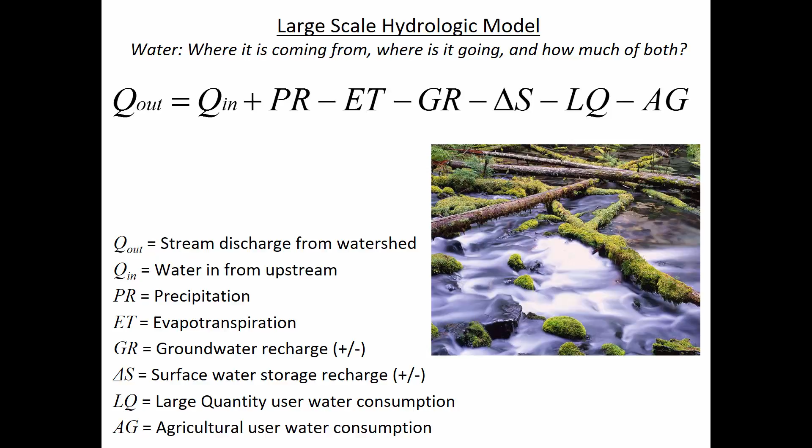Before we can find the flow coming out of a watershed—the word catchment is sometimes used to mean a smaller watershed, or to describe urban areas or urban watersheds. So in a catchment, one of the things that's going to influence how much outflow there is are abstractions.

This term is most widely defined as just the difference between precipitation and rainfall excess. This is an important distinction to make, and sometimes precipitation and rainfall excess are used interchangeably, but there's a subtle distinction between the two.

If you think about the water that falls from the sky, not all of that water is going to contribute to runoff. In fact, even if you account for infiltration, not all of the precipitation minus infiltration is going to be runoff, because sometimes the water gets stuck in other places.

Two of the places pictured here are surface puddles on a really flat sidewalk, or even if it's not puddling, the moisture can be wetting a surface. That water is retained or temporarily detained and then evaporates because of contact with the surface. So abstraction is either the amount of water or the timing delay that occurs when rainfall starts compared to how much actually contributes to the discharge.

We'll talk about a couple of processes that contribute to abstraction. It can slow down the peak flows. So if we think about trying to prevent the effects of urbanization, abstraction is a good thing because it's delaying the onset of peak flow. It's also reducing the quantities.

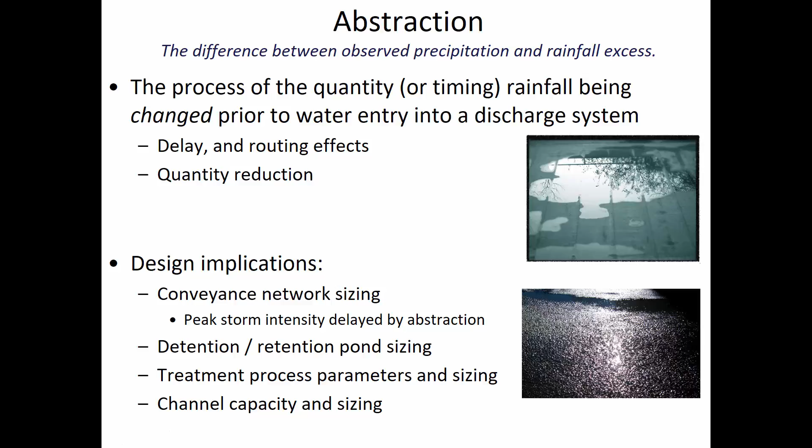Interception is one of the types of abstraction. We're not talking about football interception. What we're talking about is when the raindrop is falling through the sky, sometimes it comes in contact with plants, like trees or buildings or even crops like is pictured here. So the interception component of abstraction is how vegetation is temporarily or permanently delaying water from reaching the surface. You can see a raindrop here.

It's stuck on a plant. If it continues raining, it might tip that water over and all of it would dump onto the surface. Or it's possible that the water could evaporate and actually not make it to the bottom. So what do you think are some of the factors that affect how much water is intercepted by plants?

The amount of plants. Okay, that's a good factor. And what do you mean? You're right. And so what's your rationale there? Why do you think that's the case?

Okay, yeah. So you're thinking in terms of the surface area of a plant. Remember last week we were talking about clays and how clays have a really high surface area. Was that last week or two weeks ago? Okay, plants can have a high specific surface area just like other things can too. So the type of vegetation has an effect.

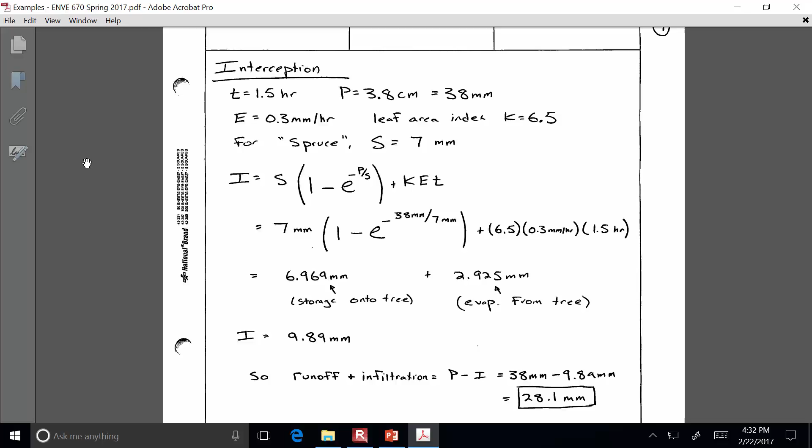Now, how accurate is this? Man, probably just barely accurate enough to even put into a textbook, because there are so many variables. If you think about it, temperature isn't directly in that formula. So how accurate do you suppose you're going to be able to estimate the amount of evaporation during a storm? And the leaf area index could vary from tree to tree. Like if I characterize the leaf area index for these big gigantic trees here that are hundreds of feet tall, it may be a completely different leaf area index for an oak tree that's not quite that tall.

So you always have to take approaches like this with a grain of salt. They may be important in illustrating a phenomenon that you have to be aware of, but it's really only just a starting point, or maybe like a holding place until you find a more accurate way of estimating something.

So this is just to look at summertime, with the leaves all around the trees. In this case, I guess it wouldn't necessarily matter because we were doing spruce, right? Spruce tree. And some things like a hardwood that's leafed and a hardwood that's bare are different. But spruce is an evergreen tree that would have the same leaf area index and same storage regardless of season. Now, probably the evaporation would have been different during winter compared to summer, but we don't have any information in the example here to distinguish between the seasons. I think on the homework, problem 1, I tell you that you should use a leafed hardwood tree rather than a bare hardwood tree. So you will have to distinguish between the two on the assignment.

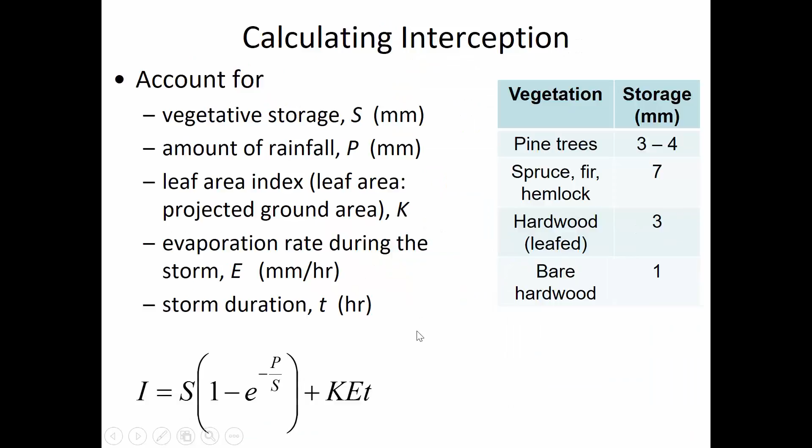Why does forest litter have a high depression storage but a low interception? Well, it depends on how you draw the line between interception and depression storage. Interception usually is meant for things above the ground. Forest litter, like branches that are broken or decaying leaves, I think is going to be lumped more towards depression storage. The forest litter, was that on the table we were looking at before? Yeah, hardwood litter, oak litter, and so on.

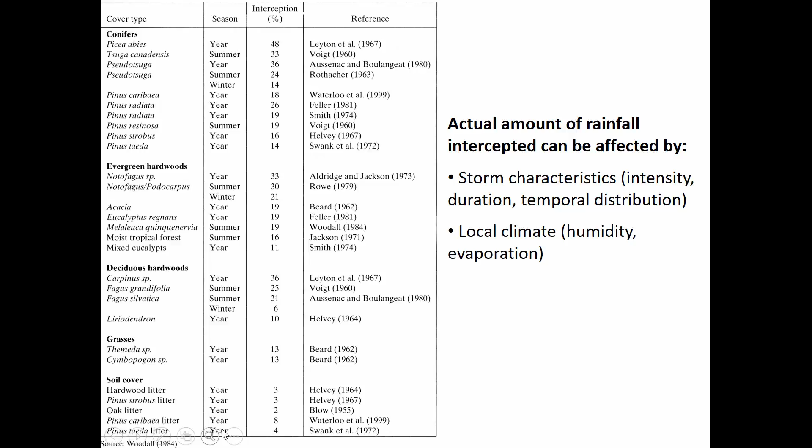I think it's because it's not preventing the water from getting to the ground. If those little twigs are laying on the ground, they're not preventing the water from getting to the ground, but what depression storage does is it may get to the ground, but it's not moving anywhere. So it's preventing overland flow. Does that make sense? Yeah.

At the very least, it causes delayed infiltration. We had the assumption of continuous ponding, and so water that is bound in the forest litter may eventually percolate down to the ground and may eventually infiltrate, but it's interfering with the continuous ponding that would have to be there for maximum infiltration.

Some of it will evaporate off of the forest litter, some of it will just stay there. I don't want to draw artificial distinctions and say the water that gets to the forest litter, that 7.6 millimeters, is just going to stay there forever, because some of it may eventually drip down. But in the case of all these abstractions, it's either a reduction in the quantity or a delay in the timing. It can have the same effect regardless of whether it's lost forever or just delayed, because we're wondering what it does to the peak, and it's going to delay the peak regardless of whether it's releasing the water for overland flow later or never at all.

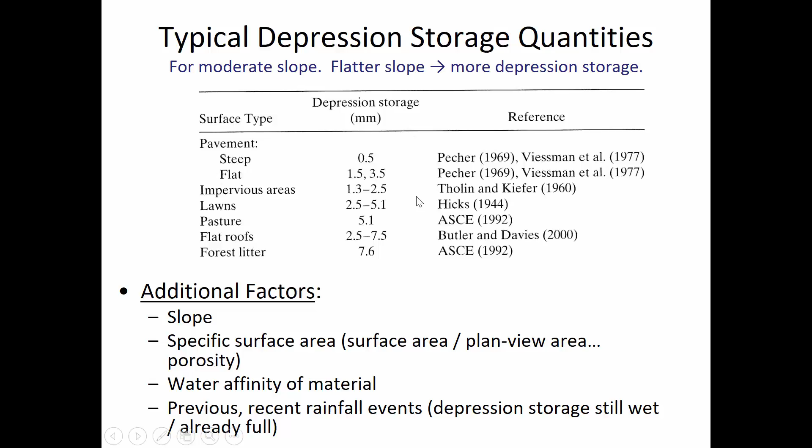Okay, so Q is what you're developing in hydrology. We want to know what flow rate is going to be coming out of a watershed in response to a storm, and we're interested for a lot of reasons, because it can affect the quality of the water and the amount of the water.

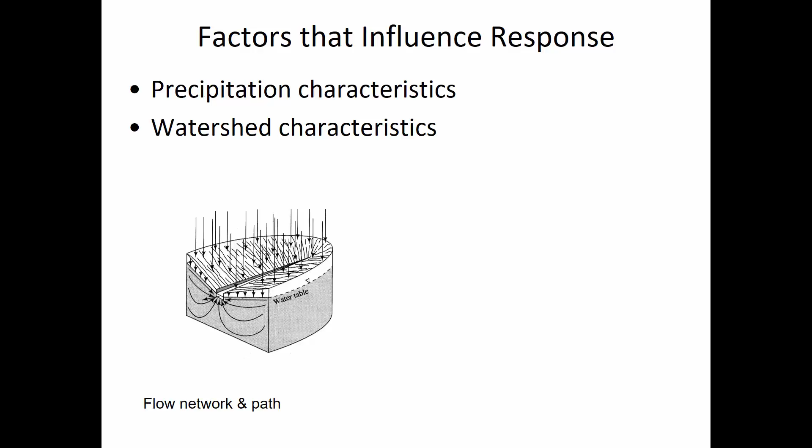Looking at the sinuosity of the streams is a factor. If you look at these streams, it looks like they're mostly straight, so the flow is going to drain into this river very quickly compared to if it was a lower slope inside of the watershed, and if the streams were meandering. Here in West Virginia, hydrologists talk about many watersheds being flashy, meaning that as soon as it rains, you have a very quick response in the stream. The reason for the flashiness of watersheds in West Virginia is because we have very steep topography, and the water is able to move over the surface pretty quick.

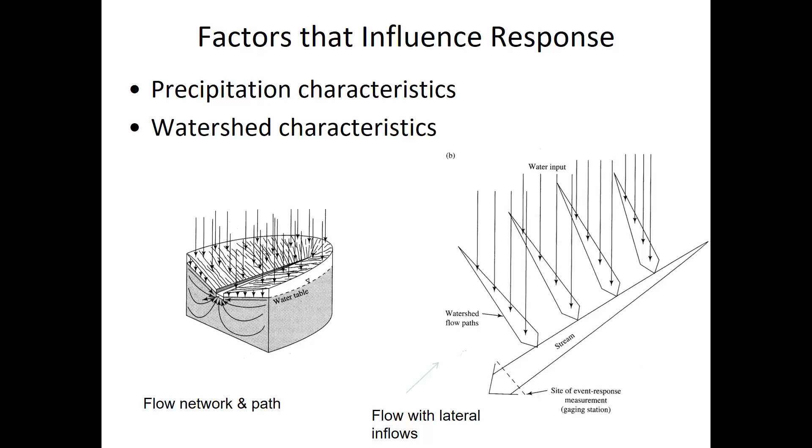There may be a certain spot that we call the outlet that we're interested in. But as we've talked about, an outlet is just a point of view. We may have a culvert crossing this stream, and so we could call this our outlet. All this other stuff is still happening, but as soon as we say that this is our outlet, that makes our watershed only the area upstream of that point that's contributing to the flow at the outlet we're interested in.

Here are some different types of drainage basins, and this is largely a function of geology in an area. There are places in the eastern panhandle of West Virginia, for example, that have trellis type streams. If you look at aerial maps, you'll notice that the streams are kind of straight there. They don't meander in the same way as, say, an aerial photo of Huntington, where the streams are all over the place in a pattern that's called dendritic.

But in coastal areas, like the coastal plain in the eastern panhandle of the state, you may have streams that are a lot more regular in their direction. Then there are combinations of these two extremes, rectangular and trellis, where it's the soil's resistance to erosion that affects where the streams go.

The streams go where the soil erodes the most quickly. That's the definition of a stream, is it's the low point in the topography, where whatever scour moved sediment downstream made it so the water would go there even more next time, because the ground level is lower and there's a greater energy differential between where the water falls and where it's going to.

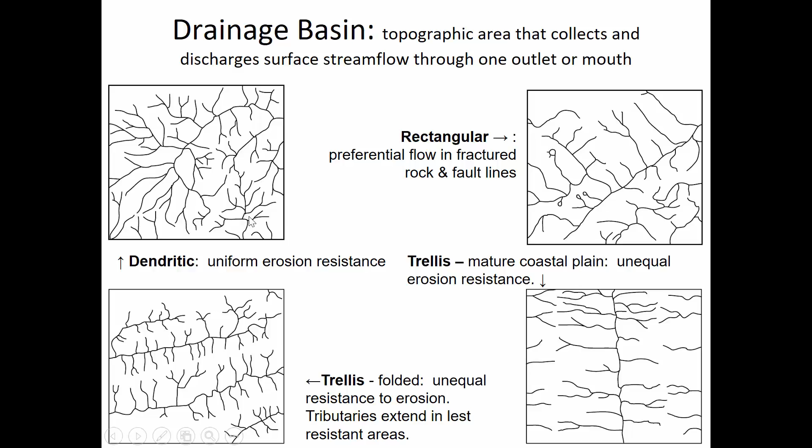Stream ordering is kind of an interesting idea because it can give you an idea of why certain locations are more prone to flooding. It's fairly straightforward that the more upstream tributaries there are, the bigger the peak flows are likely to be. A first order stream, here represented with the number 1, is a place where during a wet weather event there isn't going to be any upstream contributions to it. It's only receiving overland flow, basically sheet flow, to the first order stream. You'd have to go to a pretty small watershed size to see a first order stream — we're talking maybe less than an acre.

A second order stream is where you have the combination of two first order streams. You'll notice that a third order stream is where you have two second order streams coming together. And what would then make a fourth order stream is where you have two third order streams coming together. So the classification system is...

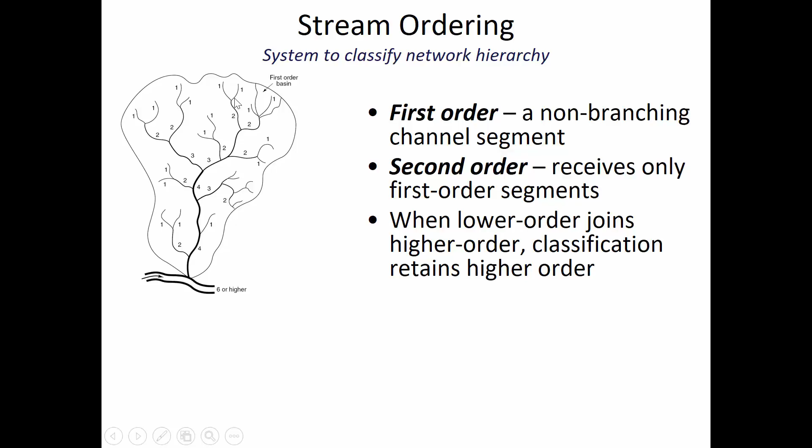In some ways, this isn't really meaningful from an analytical or quantitative standpoint — you're not going to look at a stream and know from the ordering what the flow rate's going to be. But it can sometimes tell you about the water quality you could expect, because a first order stream only has flow when it's actually wet weather. So the water you see there is probably not going to have any effects of base flow — it's not going to be groundwater coming back up to the surface.

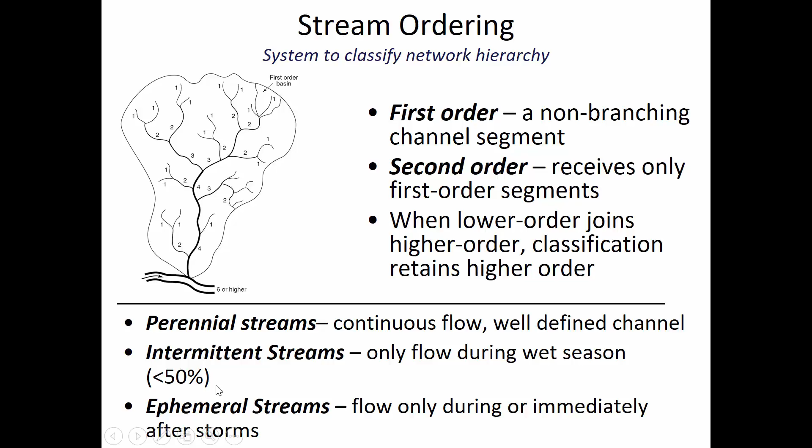In addition to these ordering classifications, there are also some terminology here: perennial, intermittent, and ephemeral. I've got a couple of pictures to illustrate the difference between those.

In the case of a perennial stream, water is present all of the time. This is a picture from the Wasatch Mountains in Utah, a famous trout fishing stream called the Provo River. You'll notice there's snow on the mountains, and that's what makes this a perennial stream—all through the summer there's snow melting in the mountains, and that feeds the Provo River. We have perennial streams here in West Virginia too, but they're not fed by summertime snow melt. They're fed by groundwater flowing towards the stream, so there's always water present.

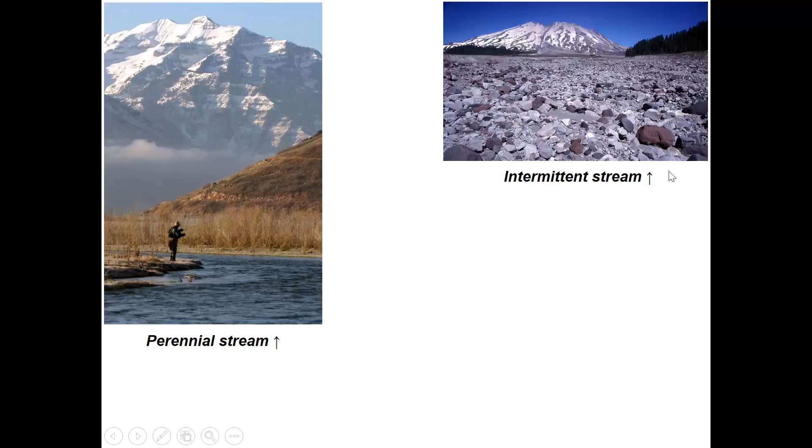In contrast, an intermittent stream is one that only has water flowing through it during a wet season. During the wet season there will be water there continuously, even when it's not raining. But usually an intermittent stream is much larger in scale than an ephemeral stream. The picture of the ephemeral stream is just kind of a ditch—a low point where water will flow when it's raining, but it won't have continuous flow at any point during the year. It would need to have rained within maybe a day to see any moisture inside the ephemeral stream.

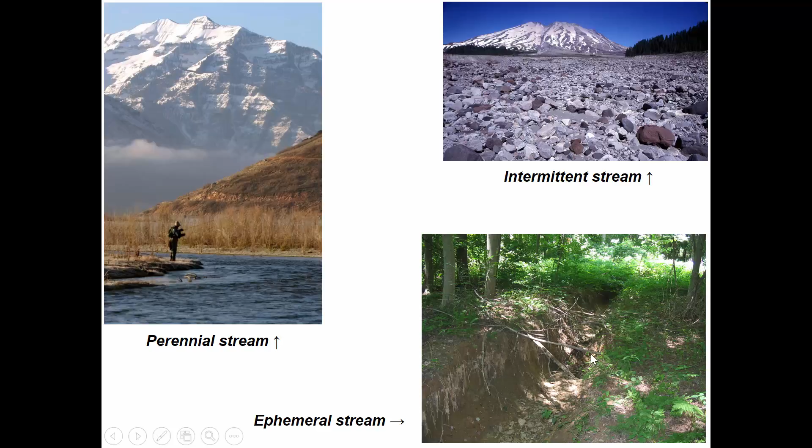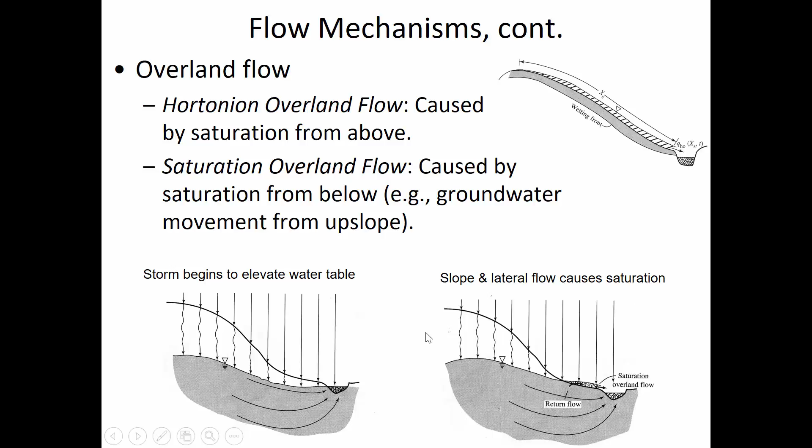Another cross-section view of a stream and the difference between dry weather and wet weather, how the water table gets raised in wet weather and contributes to the stream flow.

The saturation overland flow, I guess this is illustrating it maybe a little bit better than the other figure did because this is showing that it can re-emerge at the surface. When the water table intercepts the surface, then this is now kind of like a spring where the water just seems to be coming out of the ground because it was raining previously uphill.

So now the saturation overland flow is the base flow that is coming to the surface before it gets into the stream. Whereas in dry weather, it wouldn't actually, you wouldn't see it on the land. You'd only see that there's still some stream flow there.

So I was initially wondering why I included both of those figures, but I think it's because this does a nice job of showing that the saturation overland flow was underground, but it came back up.

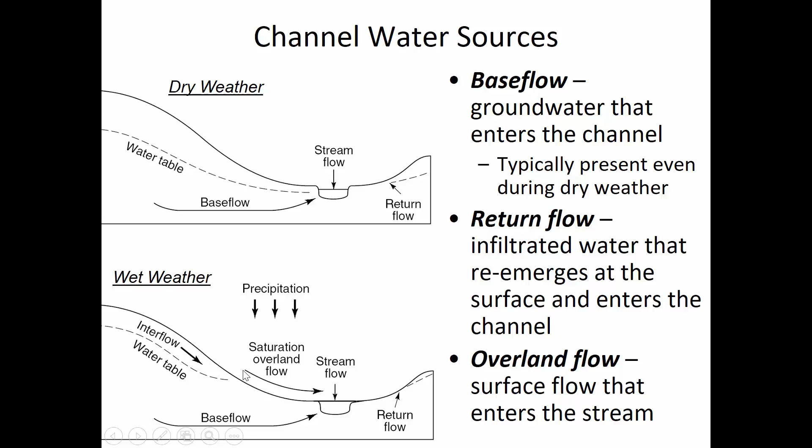We can break a hydrograph into a couple of pieces and ascribe different reasons for them.

Sometimes this is kind of a strange hyetograph. Just to be cute, sometimes they'll put a hyetograph where the height of the bar indicates how much rain there is, but they'll flip it downward, I guess to save vertical space. So it rained a little, it rained a lot, and then the rainfall slowed down again.

So what this figure is showing is that when the rainfall occurs, it leads to a rising limb, and what you see first is the saturated overland flow. But after the storm is finished, it still takes a while for the falling limb to come back down. The rising limb is quicker than the falling limb.

The reason it's so much slower is that water flows through the soil at a much lower speed than it can move over the surface of the land. All of this flow, the base flow and the interflow, is related to water going through the soil pores at a low speed.

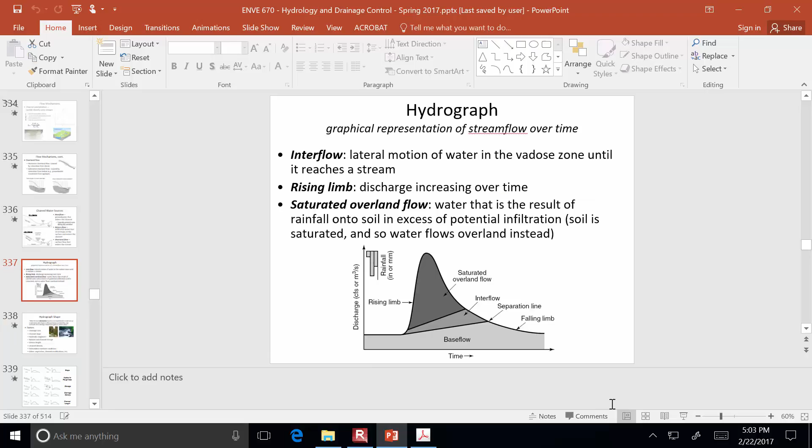Let's see. Excuse me? In this figure, why is it what? I don't know, that's a good question. Yeah, I'm not sure why it's just showing the saturation overland flow.

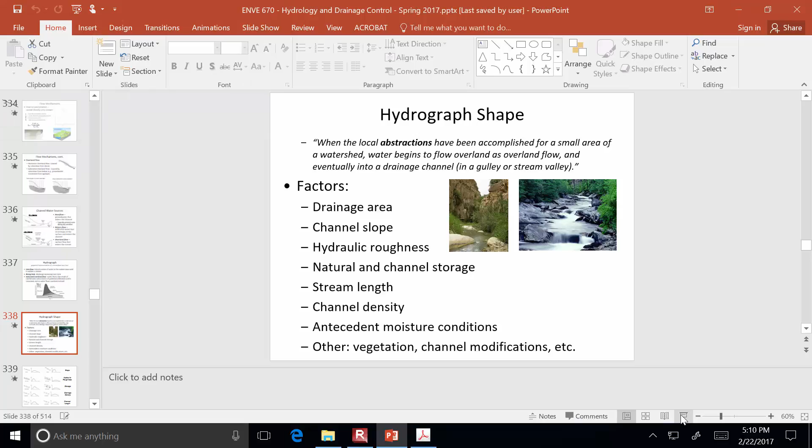So what we're going to do is look at several hydrographs and then try to predict how changes in geometry would affect the shape of the hydrograph. Things like the size of the contributing area, how steep the ground is, how rough the surface is, the length of a stream, and so on.

So what this is showing, in the case of a gentle slope compared to a steep slope, you're going to have a more flashy, rapid, high peak in the case of a steep slope. Think about it raining over a short period of time. This spread out hydrograph is saying that the water is concentrating to a single point of interest slowly, compared to the steep ground surface having an all-at-once arrival of that rainfall pulse, because it's traveling more quickly over the ground surface so it's not diffusing over such a long time period.

So does that first relationship make sense to everybody? Why steeper ground is going to have a more concentrated arrival at the outlet?

Okay, now consider the case of hydraulic roughness. What we're saying here is a smooth surface lends itself to an intense peak, whereas a rough surface is going to have a lower peak and a longer time of concentration. By time of concentration, I mean how long from time 0 to where we see the highest point. So who can explain why the rougher surface is going to cause this?

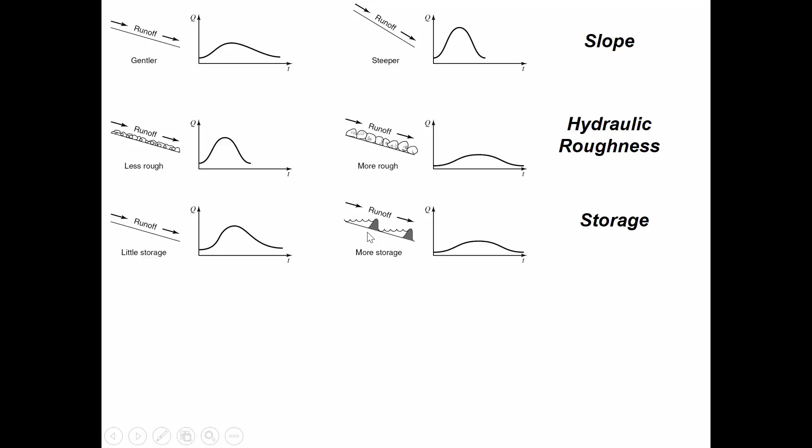So storage. This is showing that there's intermediate storage that has to be satisfied, and it's going to be slowly releasing it. So it has the same effect of delaying the flow.

Drainage density: high drainage density is talking about lots of little intermediate streams, so that the water doesn't have to travel very far over the surface before it gets into the network. Compared to a low drainage density, that means there are very few streams, and so most of the flow has to go over land before it gets into a stream. And that overland flow is much slower than channelized flow.

For the length of the channel here, we're saying a longer length is going to reduce the peak because of that effect we've already talked about, just the routing effect.

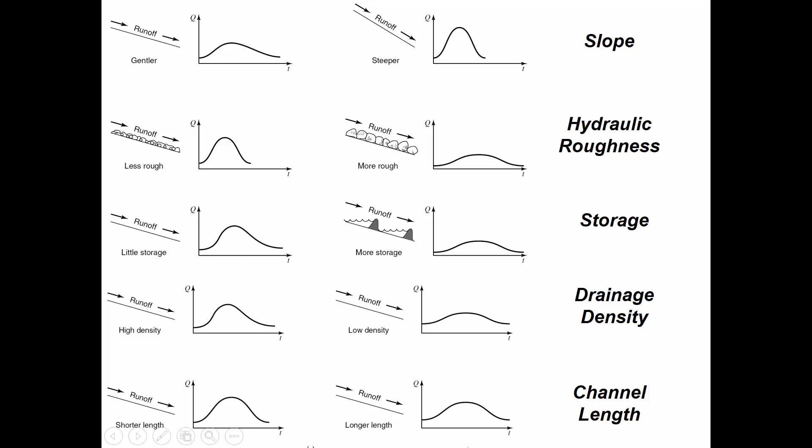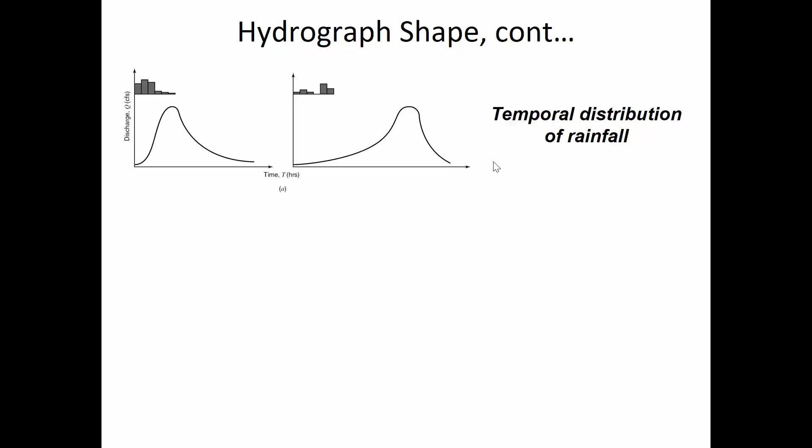Now, different things about the hydrograph shape. This is showing a front-loaded storm where most of the precipitation is at the beginning, compared to an end-loaded storm where even if it was the same amount of precipitation, just having it later in the day would mean the peak is going to have a different shape. So you don't always have the same hydrograph shape from a watershed. The hydrograph shape is in large part dictated by the geometry of the watershed, but it's also dictated by the timing of the rainfall. And that's what this figure makes the point of.

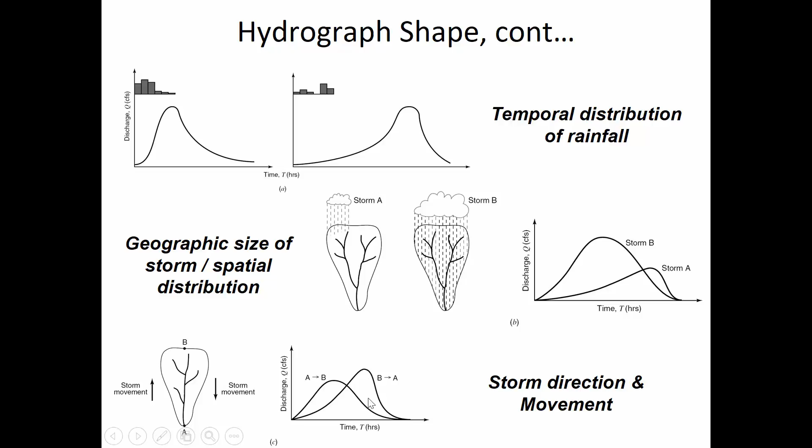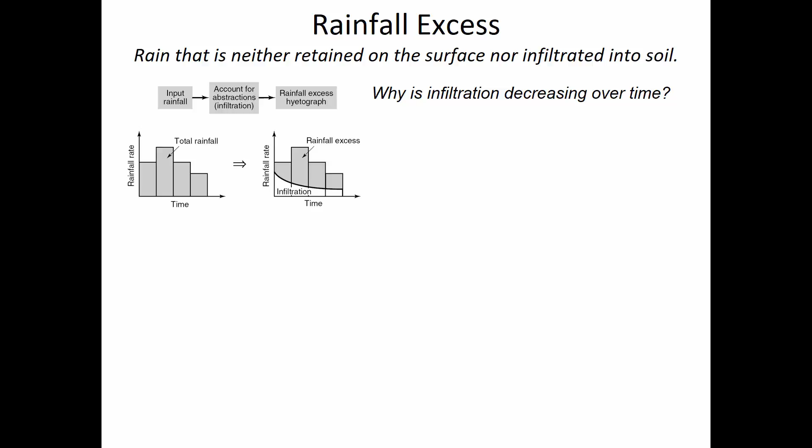The language here of a hyetograph versus a hydrograph, we've already talked about that. But this is a really interesting diagram that shows how you go from a representation of the rain to, in the end, how much water is going to be in the stream. First you start off with the rainfall, then you subtract out the infiltration amount to find the rainfall excess. You put the rainfall excess into a model that says what the hydrograph is going to be, and then you add the amount of water that's just from this storm to the water that was already in the river before the storm began—that's the base flow, the water that's a result of groundwater that had been making it into the stream channel prior to precipitation.

A unit hydrograph gives you the shape of what the runoff is going to look like for a single unit, whether it be an inch or a centimeter of rainfall excess. If you know what a watershed is going to do for 1 inch of rain, you can predict with some accuracy what the hydrograph will look like for 2 inches. You just scale the height based on the unit hydrograph you had to begin with. So this is saying there's some typical shape.

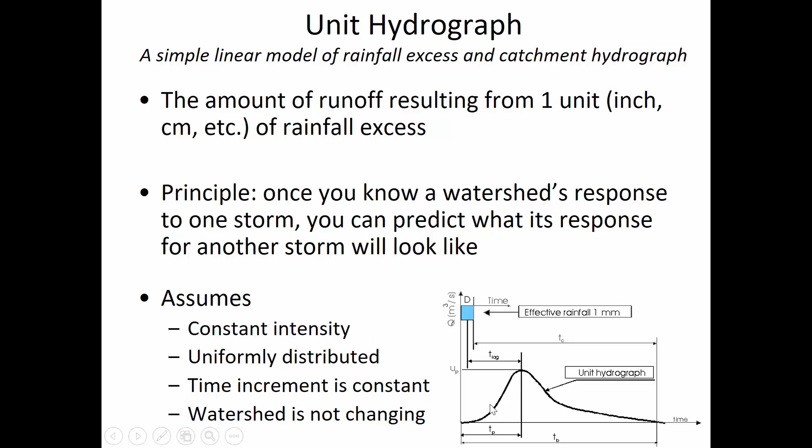This is where the rubber hits the road for the homework assignment: if you know for one storm, for one unit, what the hydrograph looks like, then you can combine them together. The hydrographs we've seen so far look like this, with multiple steps—hour 1, hour 2, hour 3, and so on.

So what we can do is take the typical response of a watershed to a unit of rainfall and layer it together—add hydrograph after hydrograph on top of each other and then come up with the resulting combined unit hydrograph, for multiple pulses of precipitation.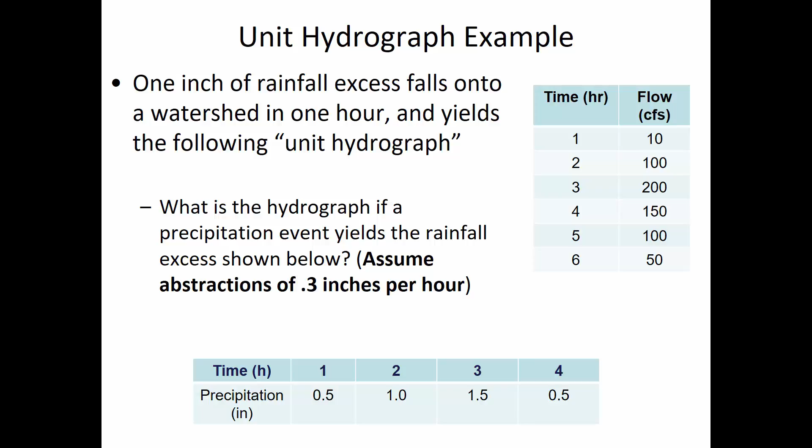Now assume there's 0.3 inches per hour of abstractions. This is the precipitation. We're first going to find out how much precipitation excess there is during each hour, and then apply the unit hydrograph to that. Okay, so start up Excel—we're going to create a table with this data.

I hope that this example will be pretty useful to you as you work on the homework assignment.

With the blank workbook, we're going to have our unit hydrograph. In the unit hydrograph, there's going to be time, going hours 0 through 6. This is basically the unit hydrograph we're going to be typing in. What we know about this watershed is if there is 1 inch of rain, this is going to be the pattern of the runoff, Q, in cubic feet per second per inch of rainfall excess.

Let's do this. So the data there is 0, 10, 100, 200, 150, 100, 50.

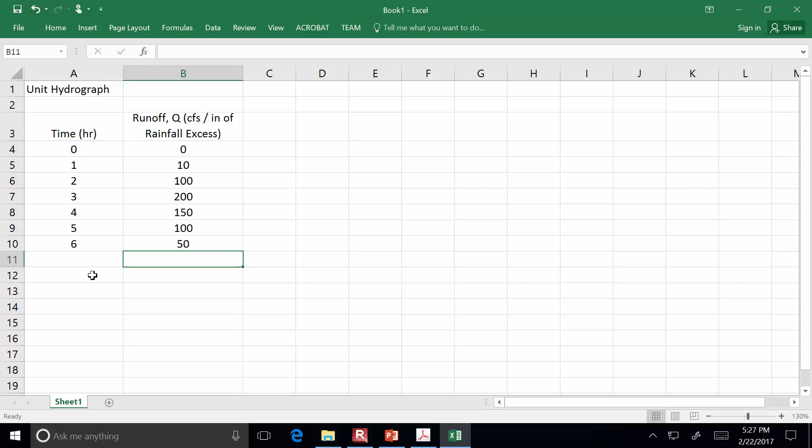Now we're going to combine that with our hyetograph. The hyetograph is basically rainfall characterization. We're going to have the time in hours, the precip amount in inches, the abstraction in inches, and then the rainfall excess in inches.

The table said that for the first hour there was 0.5 inches of rain. In the second hour, 1 inch of rain. In the third, 1.5. In the fourth hour, 0.5 inches of rain again. And the abstraction, according to the problem statement, is constant at 0.3 inches per hour.

We'll put in 0.3 inches of abstraction for each of the 4 periods. The rainfall excess is just going to be the difference between the precipitation and the abstraction, so it equals precip minus abstraction.

So now we've got the hyetograph table, and just for fun I'll put in some borders there. That was fun. Any questions so far? Do you feel like you know what the unit hydrograph is?

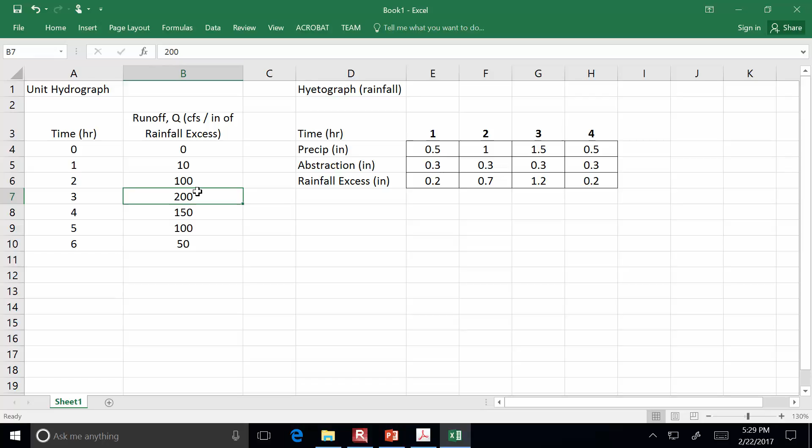If it only rained 1 inch and it all happened in 1 hour, this is the flow rate we'd see coming out of our watershed. I should be more specific—it's not an inch of rain, this is for an inch of rainfall excess. That means already taking into account satisfying all of the abstractions, satisfying interception, and so on. After all that other stuff, for an inch of rainfall excess, this is the response that would be coming out of the watershed.

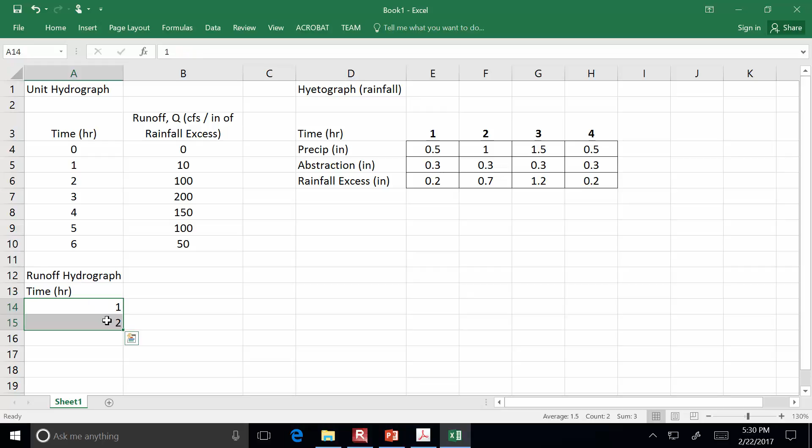Okay, so let's create now a runoff hydrograph. We're going to have time in hours going from the first hour all the way through the 10th. We're going to need 10 hours for this one, going down here to 10 hours.

And then this is the rainfall excess during the period shown. The period that this column is going to represent is the first hour. So let me label hour 1, hour 2, hour 3, hour 4.

During hour 1, I'm going to multiply the unit hydrograph by 0.2 because there wasn't a full inch of rain, only 0.2 inches. So it equals 0.2, anchoring that reference, times the hydrograph amount for hour 1. I guess I could have started this with 0, but I didn't. So we get 2 CFS instead of 10, because it was just 2/10 of an inch. I can drag that down through 6, and after that it's just 0—there's no more flow rate afterwards. So that's the first pulse of rainfall making its way through the watershed.

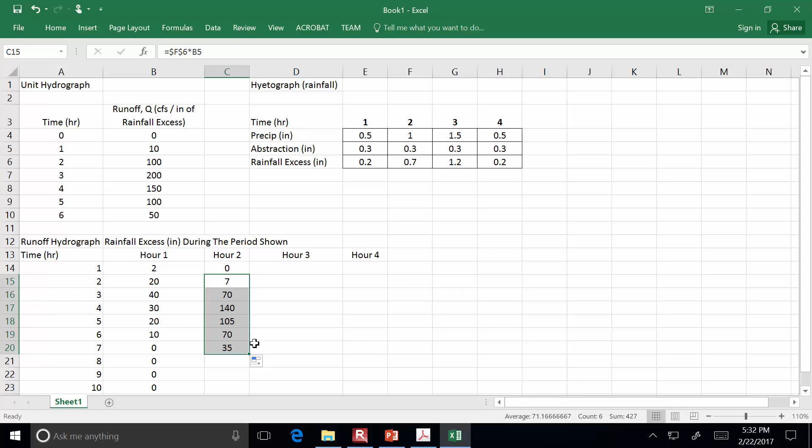Now hour 2, this is important—we need to stagger it, we need to delay by an hour. So I'm going to put in a 0 here because the hour 2 rainfall doesn't start arriving in hour 1. The first little bit of that second pulse of rainfall begins to arrive during hour 2. So it equals the reference to 0.7, anchoring that cell reference and multiplying it by the unit hydrograph, dragging this down, and then adding zeros afterwards. Do you see how it's staggered? The reason for the staggering is because the rain is coming an hour later. Is everybody with me so far?

Any questions? I bet you can predict what to do for hour 3 and hour 4. Let's see what formula you got here for the first one—I'm just curious to see that.

Okay, click up there. Let's see, I don't know—did it lock up or something? Let's see. It won't get you in there, huh? Try saving your file, I wonder if... oh, got it. Oh, CSV, that's odd, no, say no. And save it, yeah, as an Excel workbook.

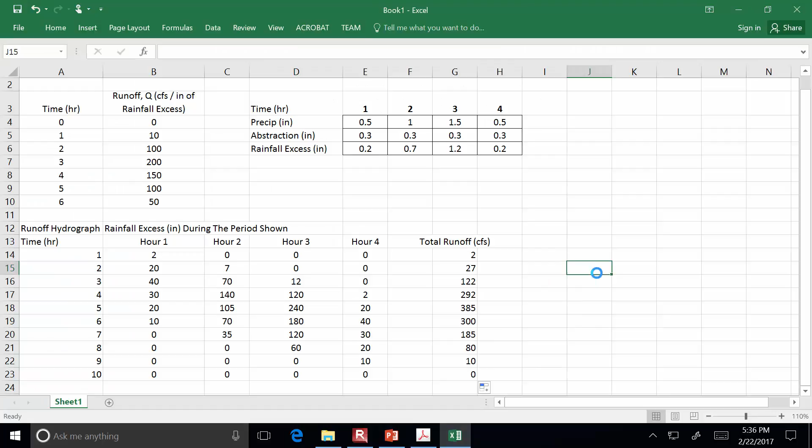So that's the idea you need to apply for problem 3 on the homework assignment. It's the same basic thing, but in SI units rather than traditional units.

All right, if you're still working on this, that's okay. Just remember the video recording will have all of the steps that I did, so don't feel like you can't ever catch back up again. We're going to move on to some other things just because there's a few more things I want to help you out with on the homework. But this is there, and I hope you'll finish the example just to use as a good reference for when you have that assignment.

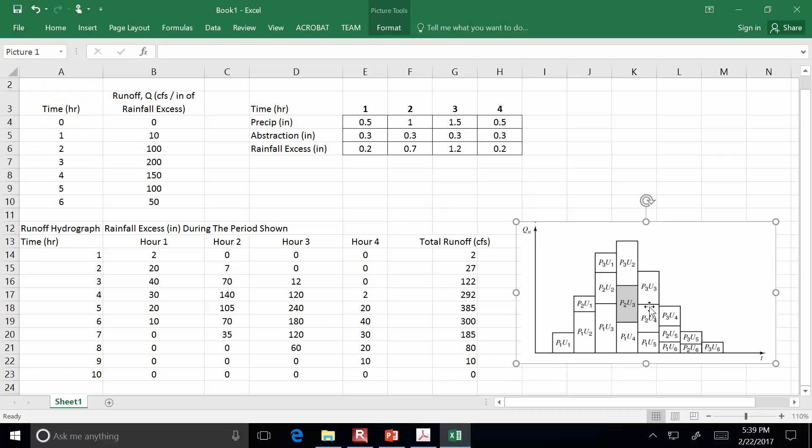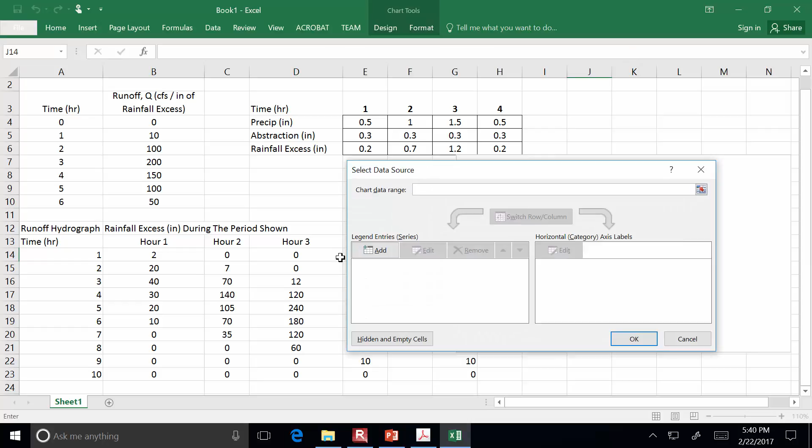So I have a handout for you that goes over some instructions, and we're going to go through these steps one at a time and look at how you can synthesize a unit hydrograph from this. But it's not going to have the same visual appeal as an actual runoff hydrograph. From this one we did, if we were to create a chart of this hydrograph, the input X data is going to be time—so here's our time—and then we'll use the total flow rate for the Y data.

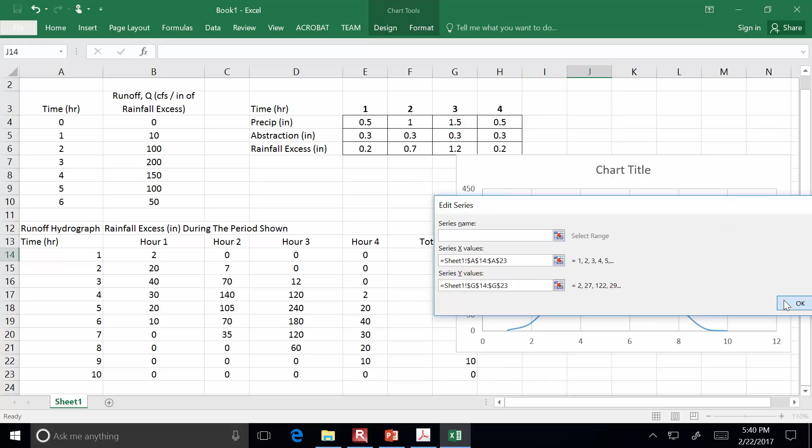It's a pretty nice looking hydrograph. It peaks up and then comes back down again. In the case of the synthetic unit hydrograph, it just assumes a triangular distribution, with some peak flow, and it takes longer to drain than the rising limb.

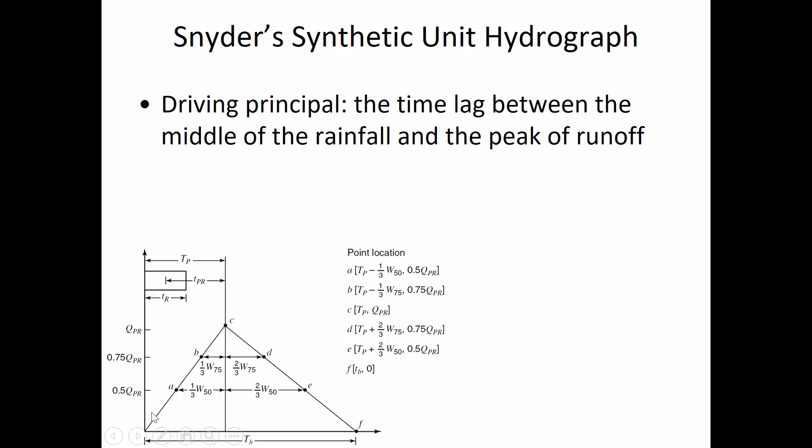So let's go through the handout that shows you step by step. These same steps are summarized in the book, but I felt like the way they do it in the book makes some of the units a little bit unclear, so I've come up with this handout to try and clarify that procedure.

All right, so you've got the handout there. Let's go through this example where the area is 5.42 square miles, and the length of the main stream, L, is 4.45 miles. You can write those numbers straight onto this example page here.

These other regional parameters, C sub T and C sub P, are things you'd have to look up out of tables of data, so we just take these as given. We're going to go through and find the standard duration, and then use it to find the synthetic unit hydrograph for a rainfall excess duration, meaning how long the storm lasts, of 30 minutes.

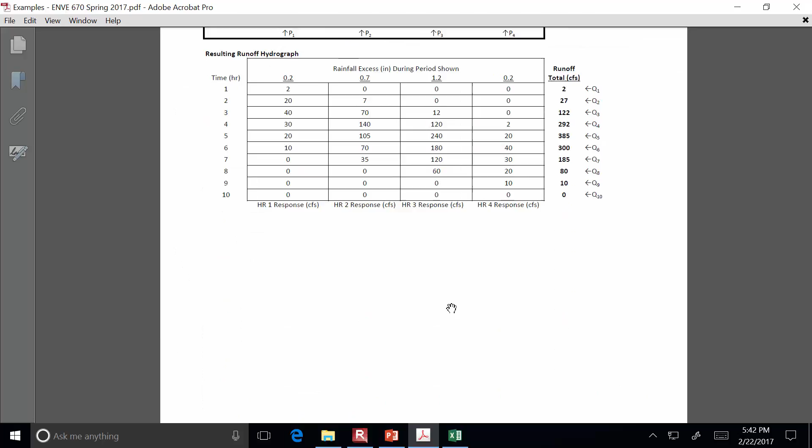Here's that handout, and let me give you a few minutes to do those calculations, and then I'll show you what I've got. We'll compare the numbers.

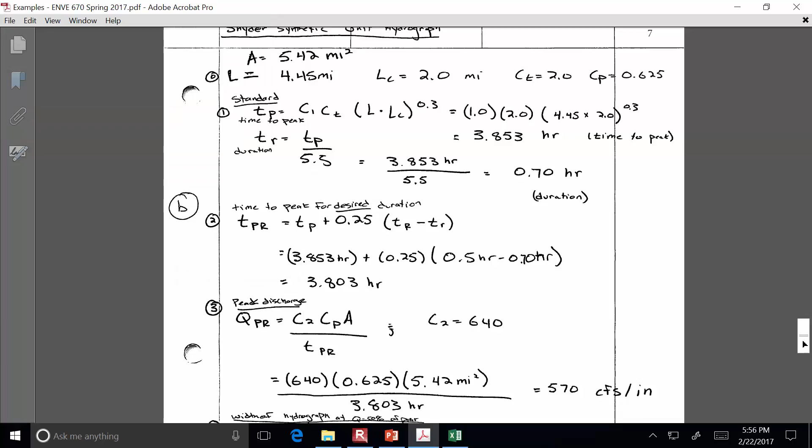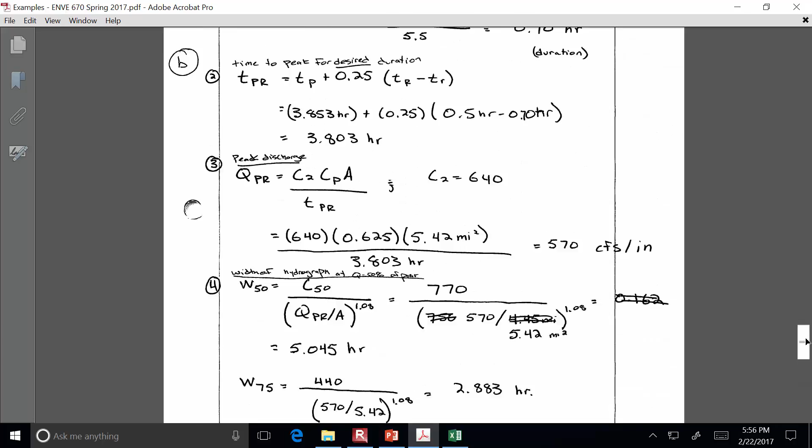So on the handout it says, what if you wanted it to be for a 1-hour storm? If the T capital R is 1 hour, I think what we're going to see is the peak would be 551 CFS per inch for the step 3 component, whereas if you change the timing down to half an hour, 0.5, as the desired duration, then it boosts it up to 570, because it's over a shorter time period.

The handout has a part A and a part B. On the slide, I guess I would need to edit it. We have to calculate the standard duration, certainly, but then to match the handout, this was part B, but there was also a part A for an hour. Sorry it didn't match initially.

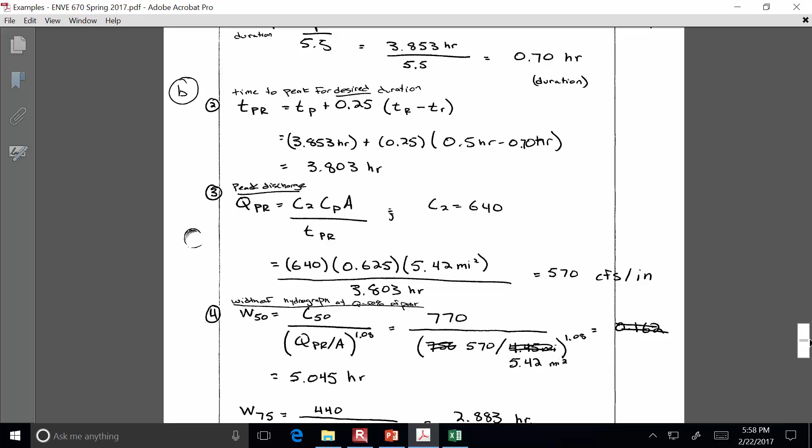Okay, so it's good to be aware of empirical procedures and empirical equations like this. The units don't make a lot of sense. Sometimes I get students asking, like, what is the 2581 for the C5 value and the 11.11?

The units of that, just in case you're interested, are related to how many square feet are in a mile. So, for example, there's an empirical factor of 4, and then there's 5,280 feet. If you square that, it's per square mile.

And then if you convert, there's 12 inches per foot times 3,600 seconds per hour. What you end up with is 2581 cubic feet per second per square mile times an hour. So if you multiply this number by your area in miles and divide by the flow rate in CFS, then you'll get hours out of it.

Where we were applying that conversion factor here, we were trying to find a time. So we had A, which was an area in miles, and Q sub PR, which was in cubic feet per second. The factor that makes the units into a time in hours, that C5, is going to have the units shown here.

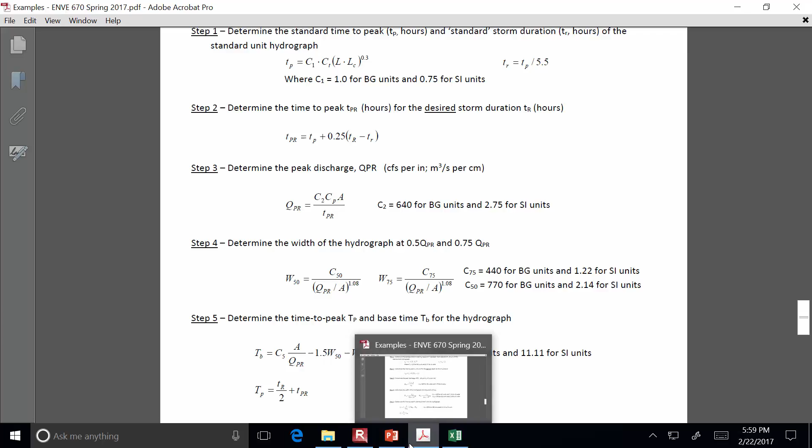There is a section of the book that addresses this. It explains all of the steps and shows what the shape of the hydrograph should look like. Here in the solution, I illustrated that it's just going to be a triangular shape. And if the peak flow rate is 570 CFS per inch of rainfall excess, then the meaning of the 14.09 that you calculate is that's when it finally goes back down to 0 again in the unit hydrograph.

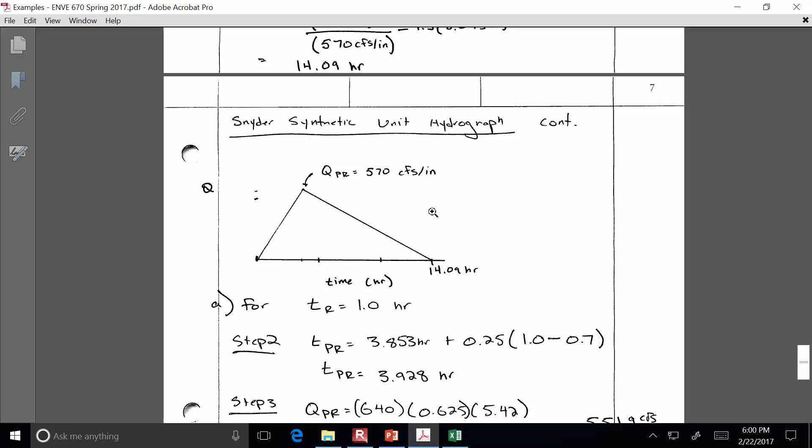So these are better than nothing, but not likely to be exactly what you'd observe if you actually did a physical measurement of the runoff.

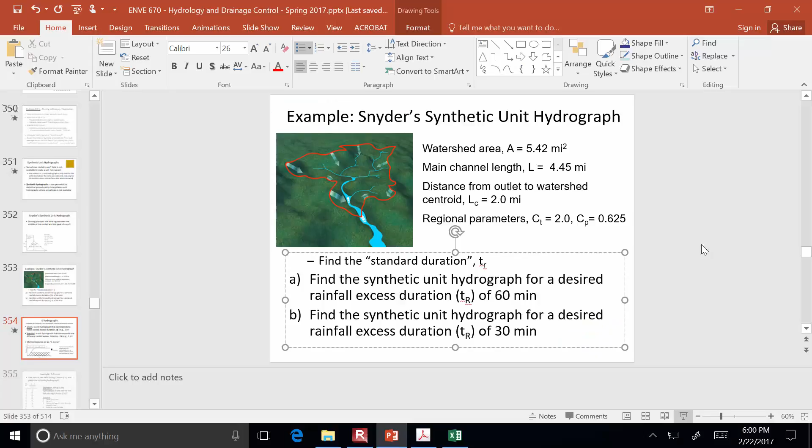One last thing we're going to talk about is called an S hydrograph. If you have a unit hydrograph that has a certain duration, an example of that was this hydrograph we were looking at. This was caused by an inch of rain that fell within 1 hour. But you could also have a unit hydrograph and see what the response of the watershed is if that inch of rain came down during a 4-hour period, or during an 8-hour period.

Let me show you what that all breaks down to, just as an illustration. Let's say that an inch of rainfall excess occurring over 2 hours gives you this hydrograph. This is a really big watershed, so although the rain is happening over 2 hours, the peak doesn't travel to the outlet until 8 hours, and then it's draining for a long time after that. For the same watershed, not changing any physical parameters, same area, same slope, what if just the rainfall patterns were a little bit different?

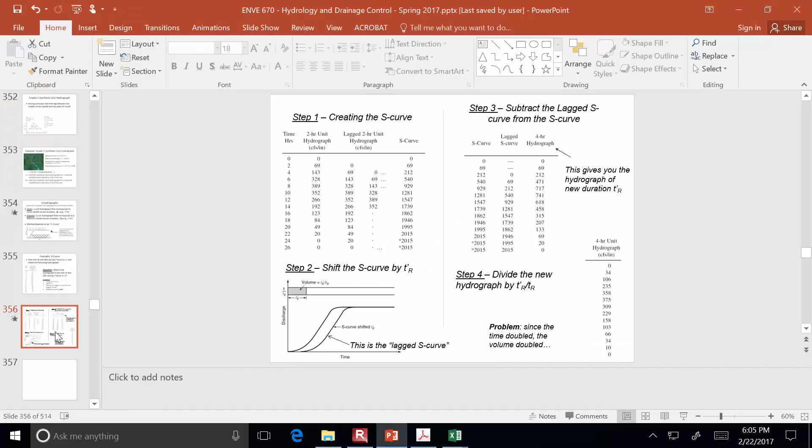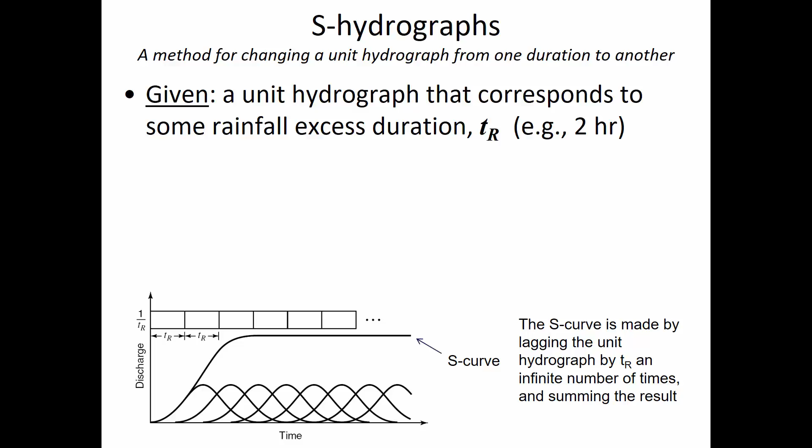If I had more and more columns, it would extend indefinitely. This shows that you have many of these hydrographs added on top of each other, so the flow rate just comes to some maximum plateau. This column is the S-curve. Now the lagged S-curve is the same thing, so I take the combination and then lag it by the duration here.

I want it to be at 4, because that's what I'm trying to find, the 4-hour hydrograph. So I paste the same one at 4 hours. Oops, what did I do wrong? I think I must have pasted the formula instead of the numbers. So I copy the numbers, Control C. Okay, I'm going to paste special, just the values here, rather than the equation.

So I paste the values, and then you find the difference between the two. And so the lagged curve is this minus that minus that. Okay, so this one is going to be the original minus the lagged. And so you're always subtracting the two.

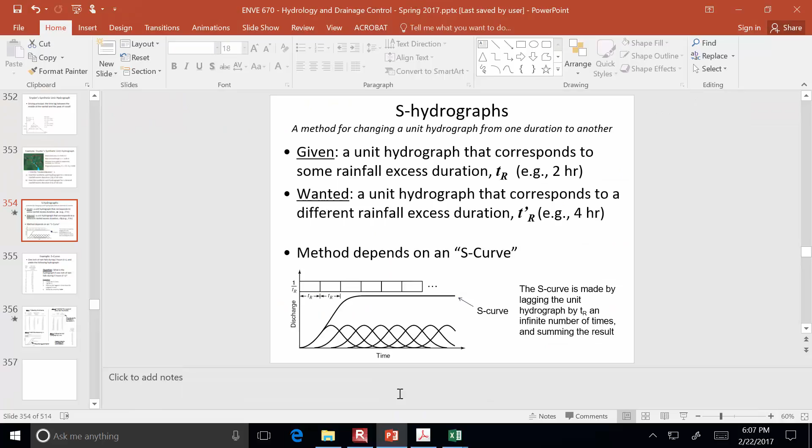Okay, so this is the lagged curve, but then look, it's not what we expected. We expected that if you spread out the same amount of rain over 4 hours instead of 2, the peak should be lower, right? But here, our original peak was 389. Now it's saying our peak is 717, so something's wrong. And the thing that's wrong is that this procedure naturally accidentally doubles the S-curve.

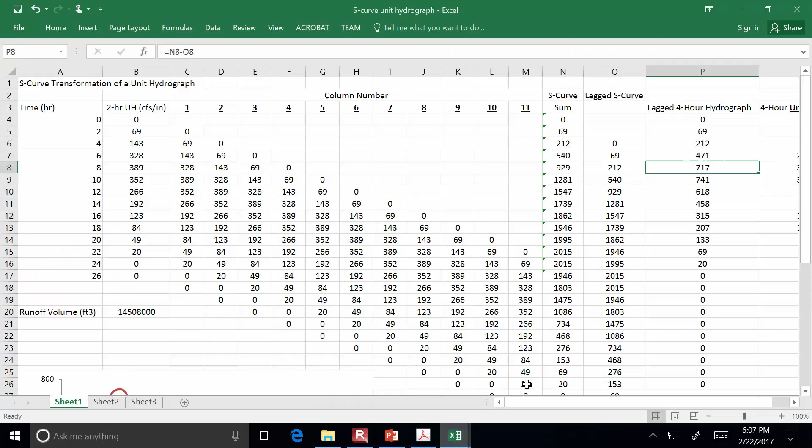And so you need to divide your result by T prime R divided by TR. So here, that means we're having to divide by 4 divided by 2. So we want to divide everything by 2 because that's the ratio of the new duration to the old duration. So here, in the final version of the hydrograph, I'm going to divide the lagged hydrograph by 2.

Okay, so then drag that on down through. Okay, so here is our final resulting hydrograph, and this is the original. So let me paste it so that we can just compare what things were. So we can look and see if for the times that we expected it was doing the behavior that we'd expect. All right, so here in the original it was at 8 hours that we'd see 389, and that was 1 inch of rainfall during a 2-hour storm.

Now the same 1 inch of rainfall during a 4-hour storm is only giving us a peak of 370. So it's lower. Not dramatically lower, but it is lower, and it's also later. That hits at hour 10 instead of hour 8. So both of those things that we predicted are true, but this is the new unit hydrograph during a 4-hour duration.

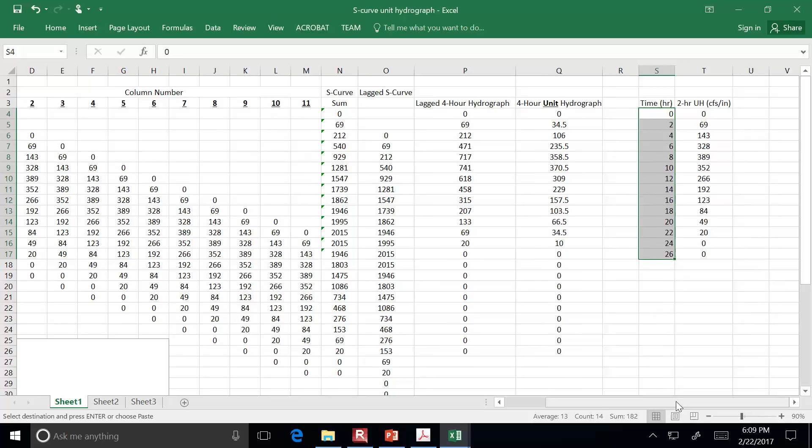Yeah? So for the 2-hour duration, we had 0, 2, 4, 6, 8. The 4 hours still have the same. Good, that's right. Yeah, it's the same, this row still corresponds to time 0, this one is still time 2. So yeah, the x values are the same amount of time. It's kind of an abstract procedure, but hopefully seeing that illustration made some sense to you.

That's all we're going to do talking about hydrographs.